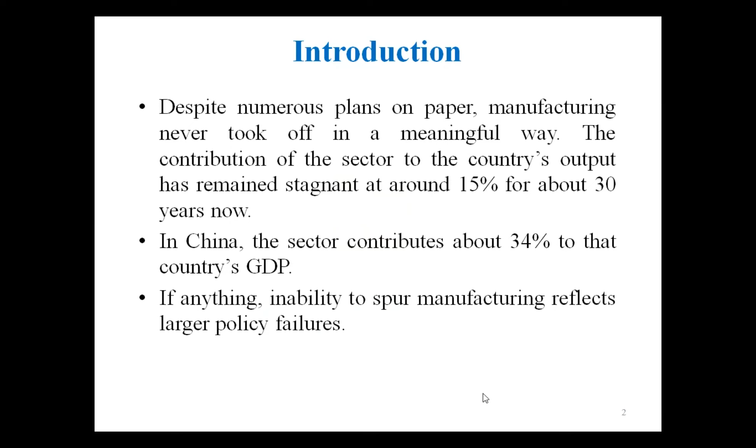So I have taken this as the topic for discussion. I will take some signature slides before I start about waste management. One reason we are interested in this is because we want the contribution of the manufacturing sector to increase. As per Niti Aayog data, the manufacturing sector is contributing just 15% to the GDP, whereas in countries like China and other developed nations, the contribution of the manufacturing sector is more.

To address this problem, the government of India has set up a National Manufacturing Competitiveness Council, headed by the Prime Minister of India, and they are interested in increasing this contribution. If you Google the Niti Aayog website, the government has an aim of increasing the contribution of the manufacturing sector up to 25% by 2025.

So just after 5 years, the government is planning a big change, that the contribution of the manufacturing sector should be 25%. Why? Because if this happens, there will be 100 million jobs for engineers, right? So typically during the COVID period and post-COVID period, there will be a lot of pressure on different agencies, specifically government, for boosting the sector for jobs, right?

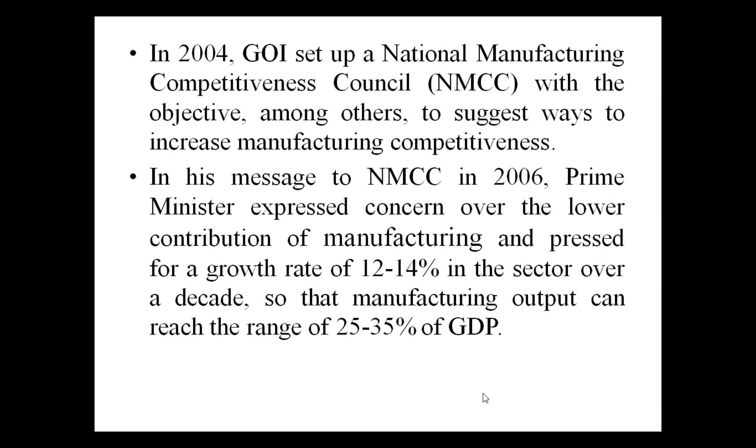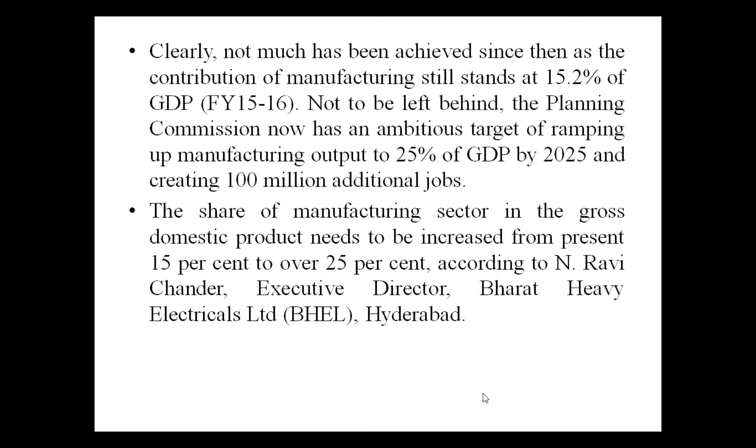Not only the government but non-government agencies, like public sector people, are also talking about the contribution increase in the manufacturing sector. One of the problems is that if we look at this contribution, we have to talk about the concept of circular economy, basically reducing waste, through waste management and recycling.

Along with this, there are issues like problems with infrastructure, finance, land acquisition, and labor laws. To understand and solve these problems, we need a solution, a technical solution through technical intervention.

There were meetings at different levels, at government level, at public sector level, even at the private industry level. In one meeting with CII and the Government of Andhra, it was concluded that innovation in product and process should be the key driver for growth in the manufacturing sector. The ultimate aim of all these discussions, like through Atal FDP or other mediums, is to increase the contribution of the manufacturing sector.

Increasing contribution can be done through reducing waste. The second important concept is innovation. If we have innovation in product development and process development, we will have a lion's share in the market, we will be the pioneer, and finally we will have a better position regarding financial stability. Keeping these things in mind, the government is very serious about increasing the contribution of the manufacturing sector.

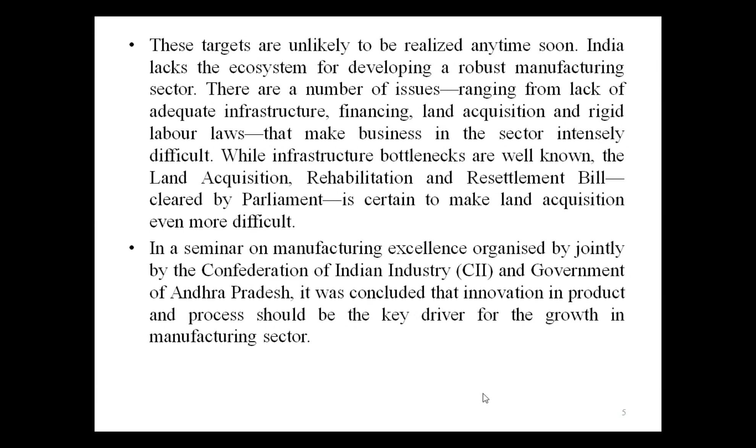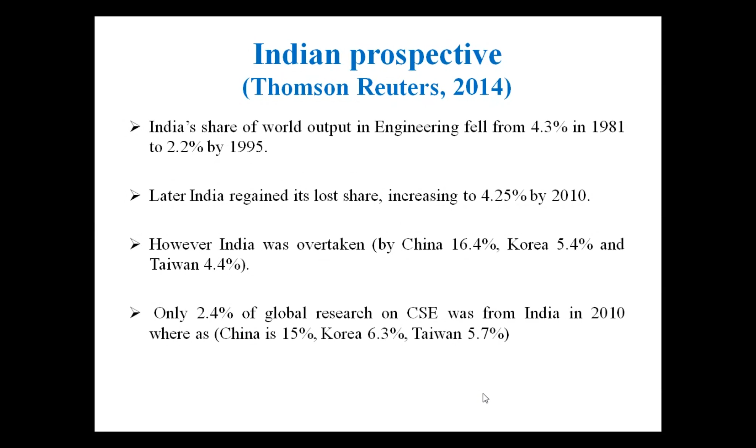Whereas China, Korea, and other countries are contributing better than us. We normally say we are good in software development, but our contribution there is only 2.4%. So we have to do a lot of research at institute level and lab level, and come up with innovative products that can help us get a better contribution of the manufacturing sector to the GDP.

There can be different methods of helping with this, and one method is waste management. Waste management is basically divided into 8 groups: source reduction, reuse, animal feeding, recycling, composting, fermentation, landfill, incineration, and different land applications.

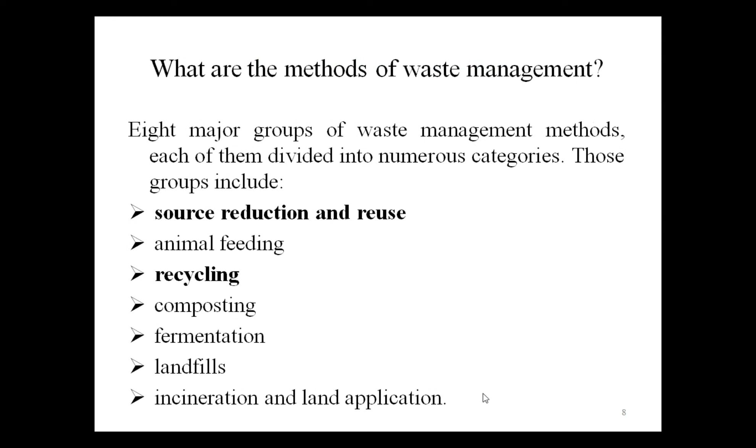But for the present discussion, since we are focusing on additive manufacturing, we will mainly be talking about source reduction, reuse, and recycling. That will be the discussion for the next hour, through additive manufacturing.

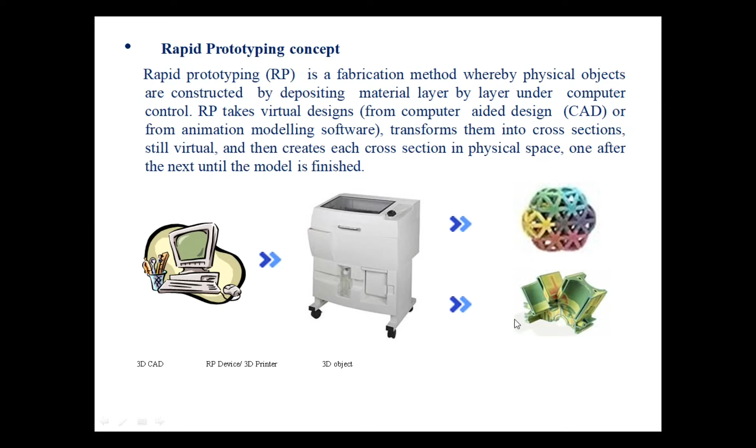Since this is an Atal FDP, and for the last 4-5 days we have been talking about 3D printing, just as a signature slide: 3D printing basically involves CAD data given to a 3D printer, which produces a layer-by-layer printing of material, forming the finally finished product.

In another way to represent the same thing, we have different layers, and each successive layer gets bound to the preceding layer, maybe through melting or partial melting, building up a platform until we get a 3D printed part.

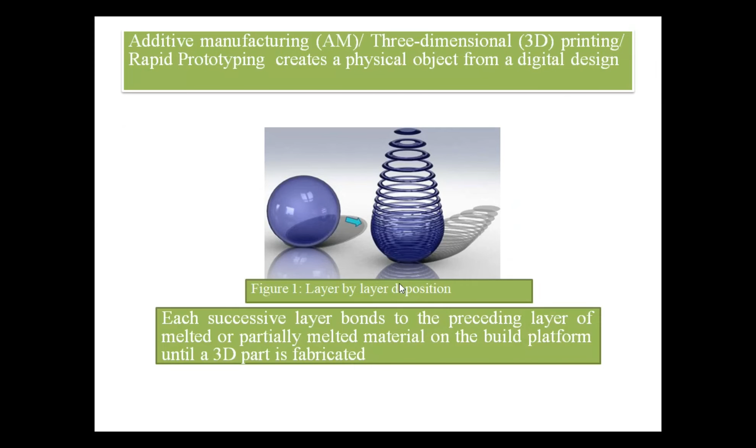Now, in addition to 3D printing, there is 4D printing, specifically for waste reduction. The idea is that in 4D printing we have some smart type of material which can have typical applications, specifically in waste management.

If we talk about adding more dimensions to the printed part, it will have wonderful applications. Imagine you are in a shopping mall or tourist place, with chambers where you feel 5D, 6D, or 9D effects. What we are actually doing is adding some extra sense to the material. Similarly, if we are interested in waste reduction, adding some sense to the waste material can be really useful.

A simple example: nowadays, typically in urban areas, we have milk in some polymer packing. Once we take the milk out of those plastic bags, we used to throw it in the dustbin. Now just imagine those polymer bags are going to be added into the municipal waste, and once we have that type of waste, it will create a lot of problems.

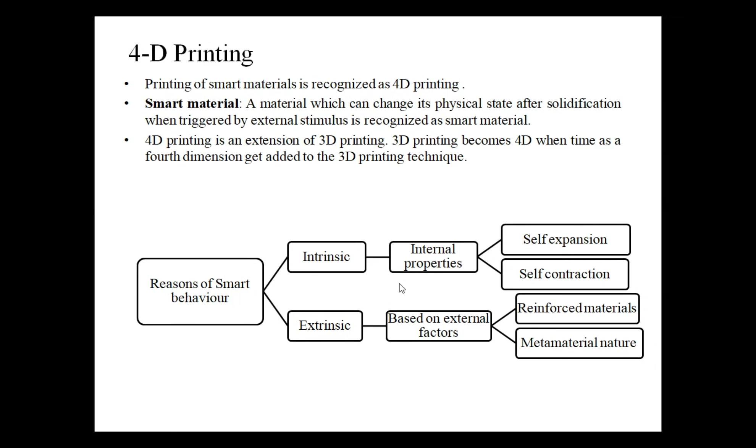We have some kirigami and origami type structures where we are getting the final property of the component, not because of the inherent property of the material, but the way the different components are attached. Like for example, take the example of a railway bridge. We use the concept of trusses there. So a lot of load, and the weight of the bridge is reduced. Now the length of the different links and the angle at which those links were basically engaged, that result into the formation of a meta material, and typically applicable for the 4D printing applications.

To understand in a better way for the printed part, let us say my material is in state A. I give some stimulus, it is converted into the state B. The stimulus can be heat. Like suppose there is an ice, I give heat to it, so it is converted into the liquid state, right? So then again extract heat out of it. The stimulus is the temperature. So it is converted into the state A again.

So there can be the stimulus in the form of electrical field or magnetic field. Suppose your material is in state A, I give some magnetic field or electric field to it, it is converted into the state B, then switch off the electric or magnetic field, it is again coming to the state A.

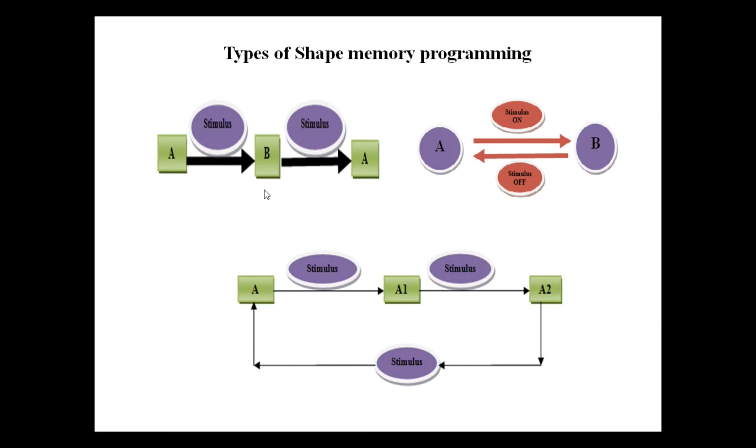Or there can be the multi-stage programming, like you can have some material from state A to A1 with a particular stimulus. It can be in the form of light, temperature, magnetic field, thermal, hydral effect, anything. Then from A1 to A2, another stimulus, then A2 to A3, or any n number of stages you can think of, which will be helping me in shape memory effect, specifically for the management as the waste management technique, right?

Now I'm giving you some of the additive manufacturing example where we can use this for the waste management through additive manufacturing. For the waste management purpose, let me introduce the audience. The waste management is basically categorized specifically for the polymers into the four categories: primary recycling, secondary recycling, tertiary recycling, and quaternary recycling. So what is the difference? You take an example. Suppose I have a virgin polymer, it may be, let us say, ABS or PLA or PA6, PVC, PVDF, PEEK. There are n number of polymers, right?

So I have selected a virgin polymer, and that virgin polymer I am using for making some part. Now the useful life of the part is over. I am again crushing it, converting it into the granule form, and then I am doing the extrusion process. Through the mechanical means, I am trying to make some feedstock filament again through the extrusion. The typical process we use is called the screw extrusion. So this is one way of recycling. We call it the primary recycling. So primary recycling by definition is using a mechanical means of recycling.

Then we have another way, that is called the secondary recycling, which is just similar to the primary recycling, but the difference is here we are adding some sort of a reinforcement into the polymeric material to enhance its property. For example, let us say I am interested in improving the mechanical property of the component, increasing the tensile strength. So I am putting some, let us say, aluminium powder or copper powder, which will be helping me improve a particular type of property, maybe thermal conductivity, maybe electrical conductivity. So secondary recycling is again using a mechanical means of recycling, but here I am doing some sort of a reinforcement.

So what we did is we reinforced the banana fibers through mechanical recycling in ABS and PA6, and we prepared the feedstock filament, right? There is a very good paper by Baharin et al. which says how to condition the banana fiber. So based on that paper we selected 1000 micron length and 100 micron dia cylindrical shape banana fiber, which were prepared at the lab scale. And to start with, we started with the reinforcement of banana fiber at, let us say, 5%.

So we have four categories now: primary recycled ABS, then secondary recycled ABS. Secondary, why? Because now 5% banana fiber has been added. Then primary recycled polyamide and secondary recycled polyamide with 5% reinforcement of the banana fiber.

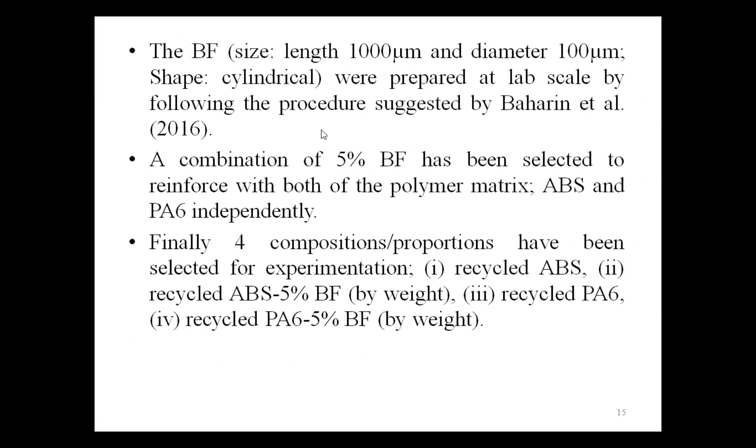How to do the reinforcement? So this is the twin screw extruder that is available in our lab. You can see here there are the two screws. I put the raw material over here. Here is a mixing chamber, and on the other side I get a prepared feedstock filament. So there are some parameters that we can control, like the temperature in this chamber.

I can control the nozzle dia, because typical commercial 3D printers have nozzles from 1 mm to 4 mm, but most commonly used FDM based printers are in the range of 1.75 mm, right? So if I have a nozzle of 1.5, then I can easily get the 1.75 dia wire. There is another parameter, the torque or the RPM, that I can control for this screw, and we can play with these parameters and finally control the dimensional features of the feedstock filament.

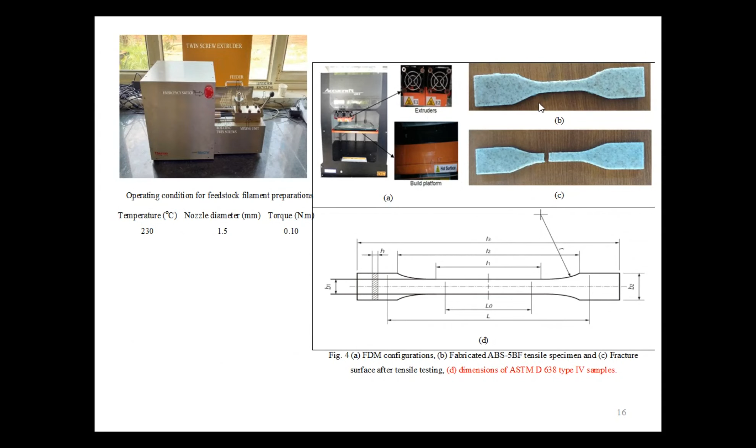So finally that feedstock filament, which has been prepared with the reinforcement of banana fibers into the ABS and polyamide, we printed the specimens. You can see some tensile specimens of ABS, and then of course we prepared the fractured samples also for the flexural strength as per ASTM D638 and D790 standards, right? This is really important to understand.

Now to understand, let us have one simple example. Suppose I purchased two plastic buckets. One bucket I put in my bathroom, and the second I put on the rooftop. You will see after a few days, the bucket that is on the rooftop may have developed some cracks, whereas the bucket of the same company, same quality, same cost, everything same, may be working in your bathroom for maybe a couple of years.

Now, why this? The answer is that in the aggressive environment, maybe excessive heat and excessive cold, the energy absorbing capacity and energy releasing capacity of that thermoplastic material is not commensurating with the change in the environment. Like in the night, the temperature may become very low, and during the day, the temperature may be very high. So once there is a change in the temperature, the energy absorbing during the heating cycle and the cooling cycle for that particular material is not matching with the way the temperature variation was observed, right?

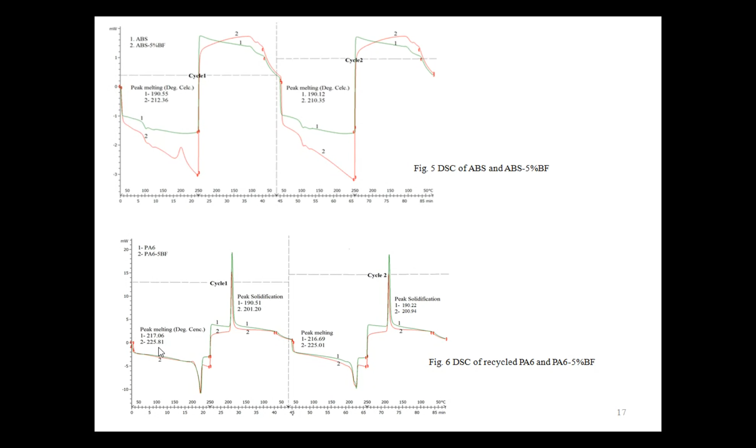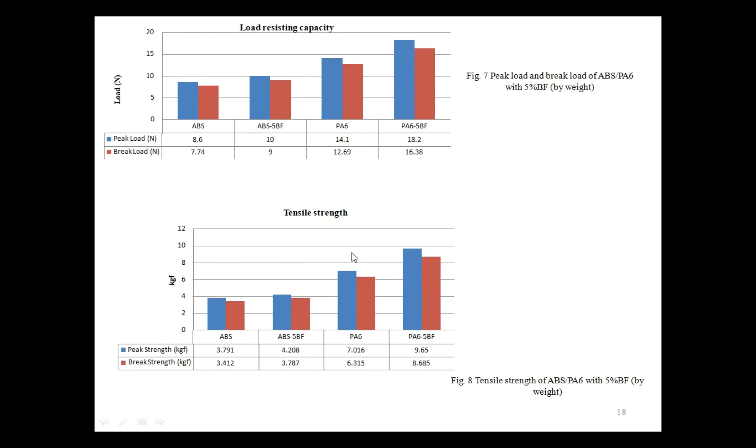Then we did some mechanical testing of the samples by printing, right? So you can see the peak load and break load have been significantly improved once we add the reinforcement for the ABS as well as for the PA6. Similarly, the peak strength, break strength, and their elongation behavior have been improved.

Now I give you one typical example. Just imagine I am interested in constructing a house. So I have to go for a lintel, and what we do is we put the iron bars. Those were tied with the MS wires, and then I put the mortar for making the lintel, right? Now those iron bars were tied using the MS wires, which are very prone to oxidation.

But if I use this ABS or PA6 reinforced banana fiber, you see the percentage elongation, specifically the break elongation, is very high. So just imagine, suppose there is a chance of some movement in the earth, and there is a collapse of the whole roof, right? Because of the high elongation of this material, this will help me, and the roof is not going to collapse immediately. The strength in the form of peak strength, break strength, modulus of toughness, Young's modulus, and the elongation for this material is better than that of the MS wires that we are commercially using for tying the iron bars in a construction site.

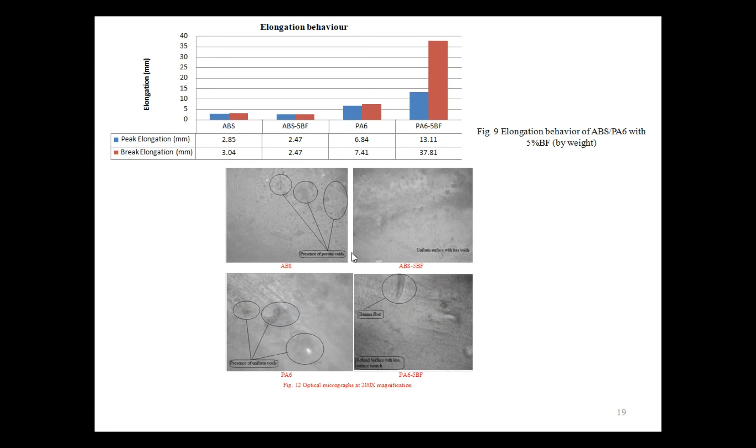We also did some morphological analysis to see what is the level of porosity. What we observed, the porosity level was significantly reduced. So we can actually do the optimization for this type of application, right? So this is one way of managing the waste. How do we manage the waste? We manage the agri waste. We manage the plastic solid waste. We do the secondary recycling.

We prepared a useful feedstock filament. That feedstock filament can be used for 3D printing. We can easily 3D print. So 3D printing will be there once we have a feedstock filament. And for the feedstock filament, the sufficient mechanical properties in the form of Young's modulus and modulus of toughness I am managing, and then it can be one of the good replacements for different applications, right?

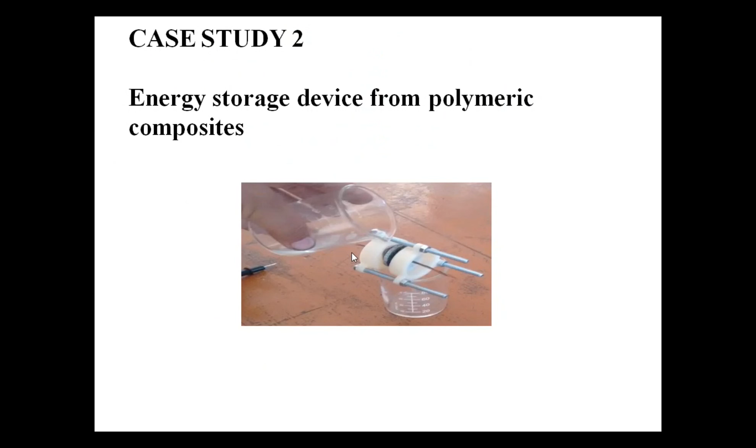Now I'm going to share with you another example of a 3D printed energy storage device, which can be another way of doing waste management through additive manufacturing, right? So if you typically see the cell which we call the battery, the AA size battery, or in our common routine language the pencil cell, right? It has basically four zones. We have a graphite cylindrical strip.

Then we have MnO2. Then we have an electrolyte in the form of zinc chloride and ammonium chloride. Then we have the zinc plate, right? So once we assemble this, because of the chemical reaction, we are able to get the final potential output in the form of 1.5 volts. Now sometimes the cells are getting wetted and we have to throw them out. And if you see, only the section where MnO2 was present is being consumed, whereas the rest of the section remains as it is, right?

Just imagine, in place of having that cell, if I print the different sections in the form of discs and then assemble, whether it will be more useful, because the disc which is consumed, like the MnO2, only that disc I am going to replace, number one. Number two, presently if you see in any house, you have a number of wall clocks, a number of remotes for operating your television, your dish, your audio system, video system, different types of things.

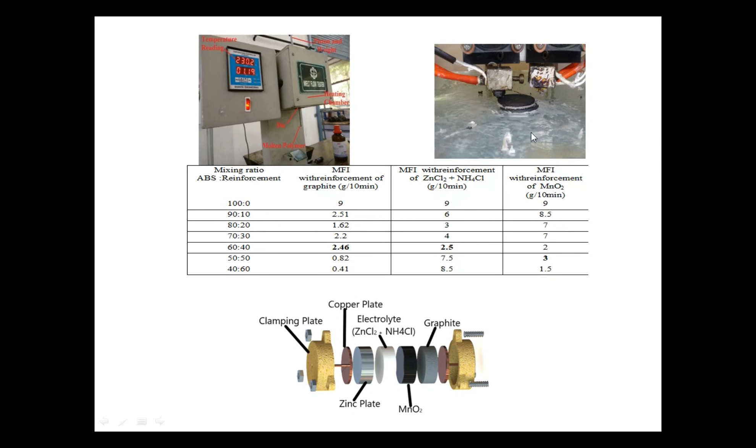So once I establish the rheological property, MFI, of the material, then I print the part as shown in the figure over here. This is the actual 3D printing going on. We printed the different discs. Once the discs were printed, we assembled them, and through this assembly we tried to see what potential difference was coming, and we were surprised that we were not able to get any potential difference. That was really shocking, why we were not getting the output in the form of voltage.

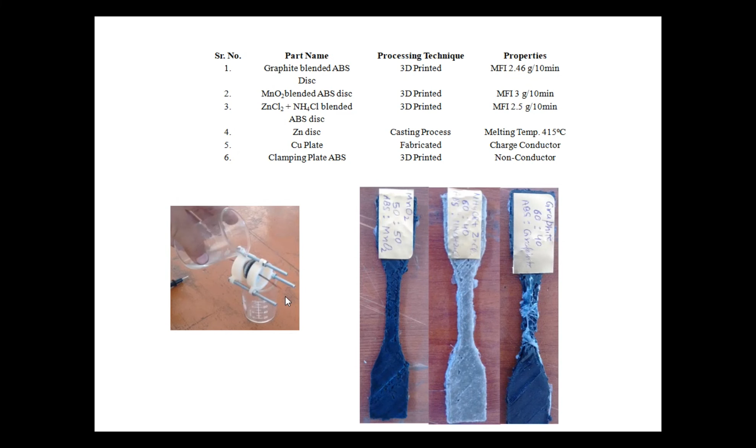Then we decided to charge this battery. How to charge this? Actually, I have ABS in which MnO2, ammonium chloride and zinc chloride powder, and graphite powder were reinforced and printed in the form of different discs. But ABS is basically an insulator, so it is not allowing the charge to flow for the chemical reaction. So we put some drops of acetone into it, so that the interface between the different discs is basically removed. Once we put a few drops of acetone, we were able to get an immediate 1.5 volt. We were so fascinated to see the output.

After this, we tried to see their thermal stability. Like I have already explained, we tried from room temperature to higher temperature. Similarly, we can go to sub-zero temperature; we tried it up to -40 also. What we observed is that the 3D printed cells we prepared were able to work at very high temperature, up to 95 degrees, whereas commercial energy storage devices are not able to work at such high temperature.

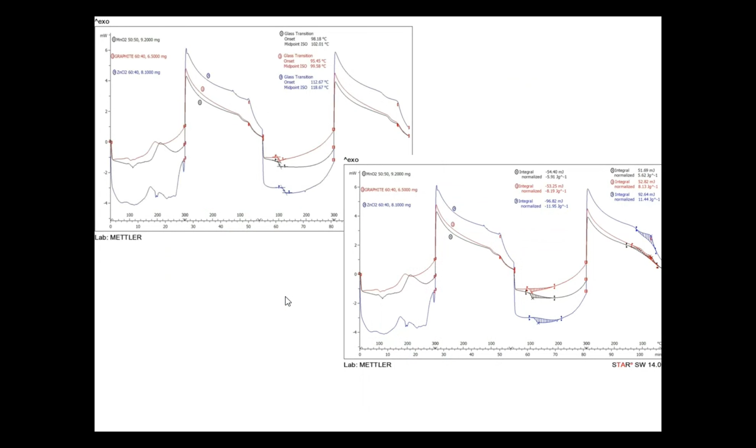Similarly, for your remote batteries and cells, once you go to lower temperature, the flow of charge is not happening properly. So if I have a shell of ABS in which these chemicals or salts have been reinforced as secondary recycling, we were able to use it at excessively high as well as low temperature. Another important thing is that we were able to consume 40% polymers, which is basically recycling. So this is another way of waste management through recycling, following the additive manufacturing route.

Additive manufacturing is putting the material layer by layer. I am printing the material layer by layer; I am printing the disc. So this is additive manufacturing. Different types of reinforcement are assembled together to complete the chemical reaction. The particular disc will be consumed, and I will be replacing only that disc.

For example, if you go to some local shop and they don't have loose change, normally they give you some candies, right? Now in place of candies, maybe after 1 or 2 years, the shopkeeper will say, take disc 1, 2, 3, 4, whatever you want, for 1 rupee or something like that. So that can be the future, where we can have household 3D printed discs which will be assembled, and you can get a relatively longer cell life in the form of potential difference, and you can work at elevated as well as low temperatures.

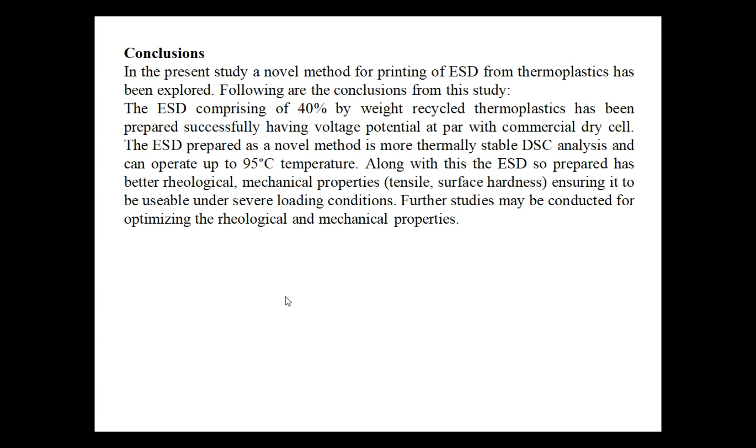So this is also another way of waste management through additive manufacturing. Now I am going to discuss this with you.

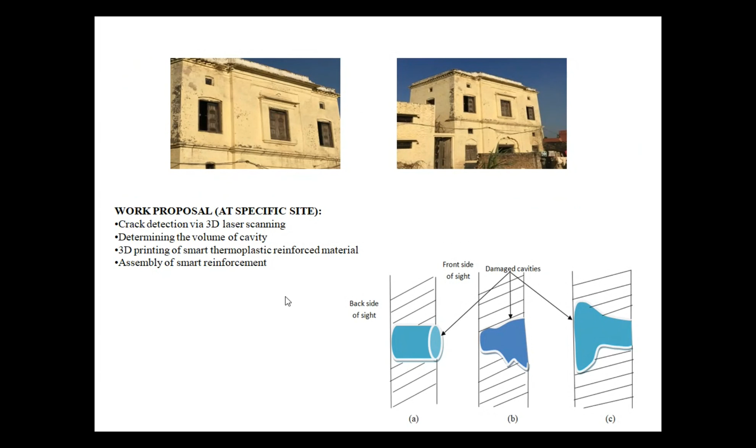This is one of the projects that we are doing, sponsored by DST, for the maintenance and repair of heritage structures. I'm showing you one of the heritage structures which was built around 1902, and since this heritage structure is in a rural area of district Ludhiana in Punjab state, we are interested in the maintenance of this particular structure.

Now, what is the actual problem? Suppose this is the heritage wall. This side of the wall is accessible to me, but this side of the wall is not accessible to me. And suppose there is a crack or cavity which is something like this. I can fill this sort of cavity with some filler.

One common example is a commercial solution by a company called Hilti. They are giving an epoxy-based solution. So basically, some epoxy based material is there for these types of cavities, specifically for heritage structures and buildings. We use these types of fillers.

Now there is a second option. Again, the entry in the wall is large, but on the rear side the cavity is small. Again, here the commercially available solution works. But now see figure C. There can be a third case when the entry in the cavity is small.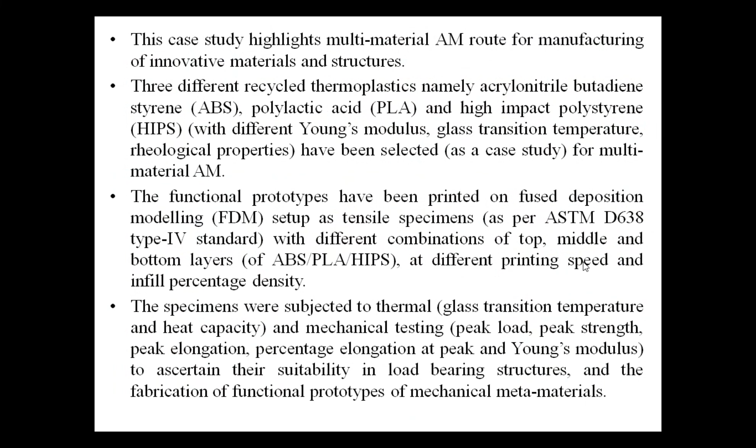So what the idea is, from the 3D printing viewpoint, I'm just sharing with you. For the basic idea, we selected three polymeric materials: one is ABS, second was PLA, and third is HIPS.

So why did we select this? Just to distinguish that these three different materials have different properties. Like HIPS, if I see the MFI, it is 7.5 melt flow index. I already explained what MFI is, how many grams per 10 minutes this material flows through a standard MFI tester as per ASTM D1238D standard. You see for HIPS it was 7.5, for ABS it was 8.7, and for PLA 13.52. That means the flowability of PLA is more. So if I work under the same temperature condition, PLA will have better flowability.

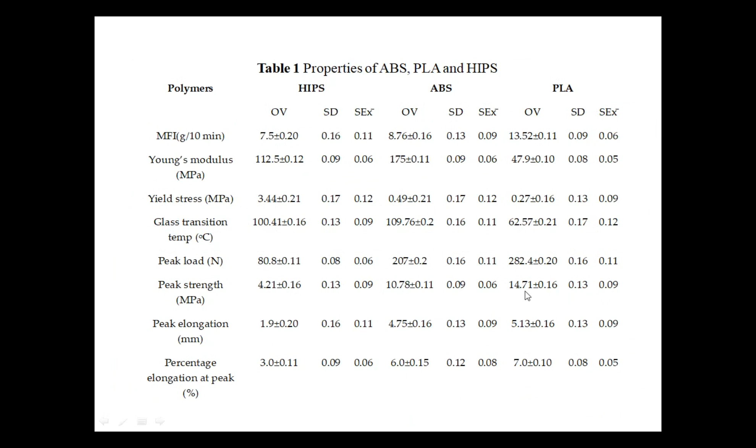Then there is a lot of difference in their Young's modulus. You can see for HIPS it was 112, for ABS it is 175, and for PLA it was 47.9. Then there is a difference in the yield stress, and a difference in the glass transition temperature. You see 100 here, 109 here, 62 here. Then you can see the difference in peak strength: for HIPS it was 4.2, for ABS it was 10.78, and for PLA it was 14.7. Then other properties like peak elongation also showed a difference.

Now what we did is select a simple 3D printer, an open source FDM printer, with some fixed parameters like diameter of the nozzle 0.3, diameter of the filament 1.75, each layer height 0.27, number of peripheral layers, number of top and bottom layers fixed, and filling pattern rectilinear. We can fix around 15 input parameters on an open source 3D printer. Then travel speed, extrusion temperature, and bed temperature were all kept fixed.

So what we actually varied was the infill percentage, infill speed, which we are also calling printing speed, and the material combination. What is the material combination? Like the lowest layer is ABS, followed by a layer of PLA, followed by a layer of HIPS. So this is basically multi-material printing: ABS, PLA, and HIPS. In another combination, PLA, HIPS, and ABS. Then in another, HIPS, ABS, and PLA. So what this structure is going to give me specifically for the smart structure, we will see.

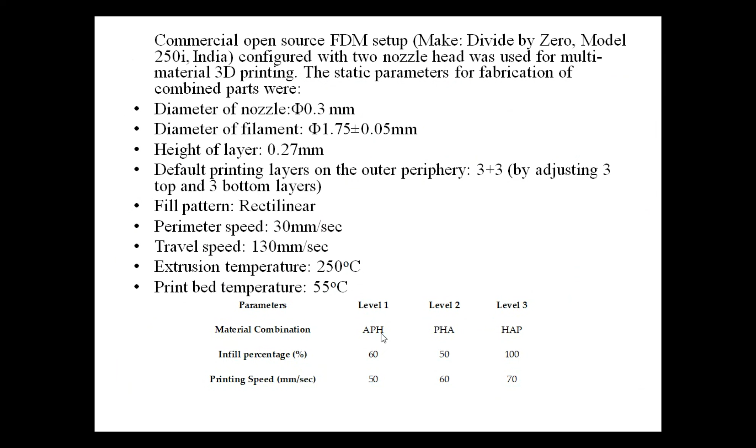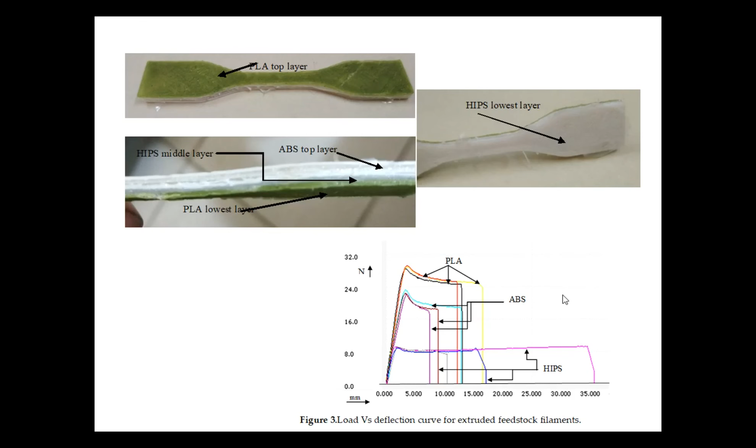You can see here I have the top layer of PLA, here ABS, here the lowest layer is HIPS. Now for a single material, once all the layers are of a single material like PLA, ABS, or HIPS, we try to see the stress-strain diagram. We prepared the specimen as per ASTM D638, and tried to see the area under the curves for the modulus of toughness and how this material is behaving.

Then we also tried to see their thermal stability, like from room temperature to 250, from 250 to room temperature, then room temperature to 250, and again to room temperature - different heating and cooling cycles. Normally it is recommended to see a minimum of 3 cycles to establish this.

So we see how much energy it is absorbing. Like one, that was ABS, it is absorbing 13.63 in heating, and releasing 13.52. That means the material is thermally stable. Whereas for PLA it is absorbing 14.71 and releasing 10.80. That means there is a problem with the thermal stability of this material.

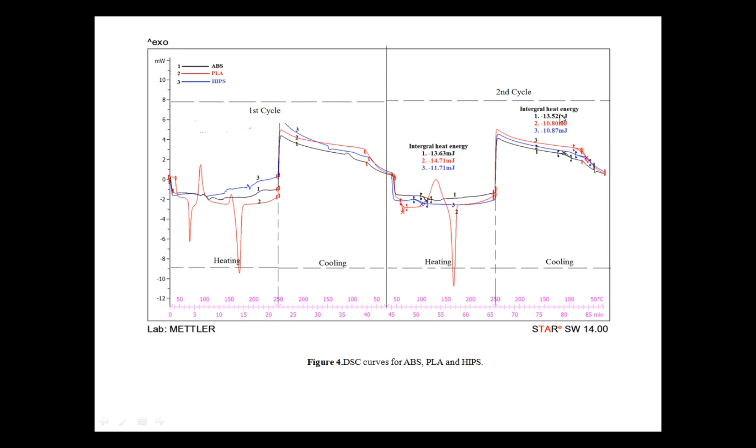Once we print this, it may create some problems regarding the thermal stability of the part. Similarly for HIPS, I have some data: it is absorbing 11.71 energy and releasing 10.87, so there is a little difference. ABS was considered to be the more stable material.

With different compositions, I recommended, for example, top layer of ABS, middle layer of PLA, and different combinations as per DOE. So we printed those parts and tried to see their effect on the stress-strain diagram.

Now this is really important. We actually printed the part, and in this diagram I looked at the morphology of the printed section. One limitation of 3D printing is the staircase effect. In the top layer here, with single material ABS at 30x magnification, and similarly for PLA and HIPS, you can clearly see that even with a single material, there is a staircase effect due to layer-by-layer printing.

In case number 1, 2, and 3, I have the lowest layer of ABS, over which PLA was printed, and over that HIPS. You can see the PLA is bulging out, meaning the material is coming out. So if I have this layer combination with ABS at the bottom, followed by PLA, followed by HIPS, I may have a problem in the mechanical properties.

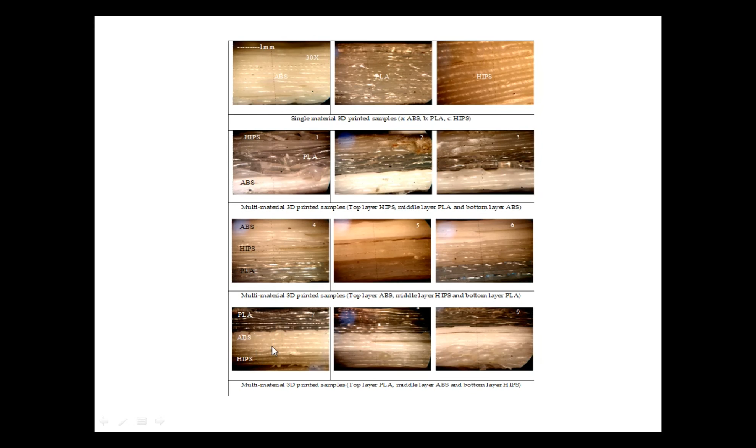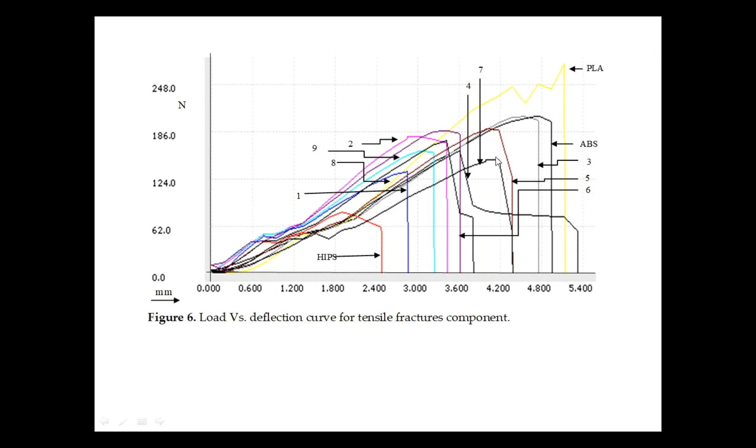I can correlate this with thermal stability also. In curve number 7, I get a very fine layer sequence: HIPS, followed by ABS, followed by PLA. This curve gives a very good result, and these are comparable with the virgin material as well.

What I am trying to explain through this example is for the maintenance of heritage structures, like the bridges I showed you earlier. An arch-type structure forms where the inner layer of the arc feels a compressive load, the outer layer has a tensile load, and there is a neutral layer also.

So if I am doing maintenance and repair of such heritage structures, instead of filling with a single material, I am interested in multi-material printing, so that where I require better tensile property, that material is selected for that zone, and where I require compressive property, that is placed on the lower side. With this combination of ABS, PLA and HIPS, selecting which layer goes lower, middle, or upper, I can select the composition and final behavior in terms of mechanical properties.

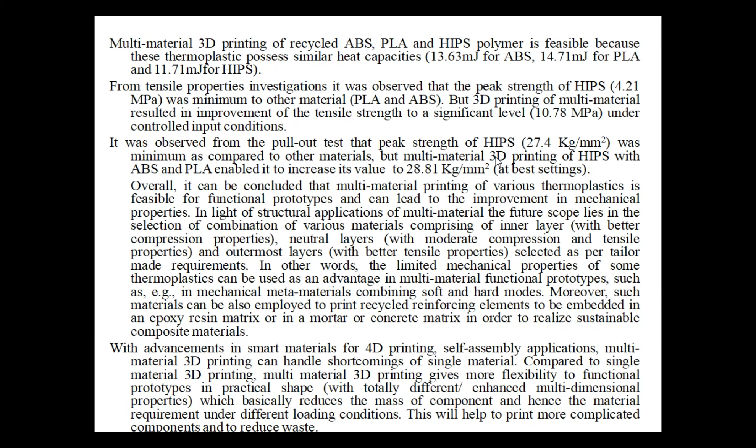So once I have to fill the strip in the cavity, I will just set the direction of the current in such a way that the whole strip is compressing, right? Once it has entered into the cavity, change the direction of the current. Now the strip is expanded. Right? So that is the idea over here. Of course, till now we have discussed the application in energy storage, application in the management of agriculture waste, then application in the area of structural engineering.

Now I'm going to explain with one or two case studies the typical application in dentistry. You will be surprised how waste management is applicable in dentistry also. I have already explained waste management: primary, secondary, tertiary, and quaternary. The first example of primary we have seen, and then we filled it with banana fiber or with different types of chemical or salt. It becomes a secondary way of recycling. Once we use some sort of chemical assistance, it becomes tertiary, right? Then once I use it for energy recovery, like typical investment casting, it becomes the quaternary way of recycling. So typically in dentistry, we are interested in this quaternary way of recycling.

So what we are recommending over here is, you see, nowadays, typically in some households, in the morning we take a breakfast of eggs, and the eggshell is thrown into the dustbin. That eggshell is a rich source of a material called hydroxyapatite. This hydroxyapatite is also called HAP. It has a similar composition, around 96% similar, to what our teeth have. Right? So just imagine there is an old age patient, and we need to replace the teeth. We need a replacement, right?

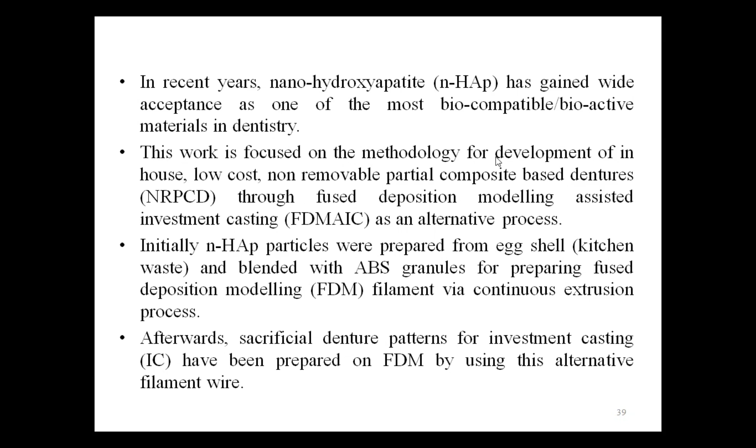We have to add some adhesive. Now this adhesive has some life. Now if my material, after putting an adhesive, is naturally getting bonded with the base, the life will be more. So that is the idea of working over this. So particularly, I will explain in a simple way.

So as a history, you can see the concept of this denture started, reported in the 7th century BC, and a lot of people have been there in Italy, specifically 7th century BC. People used to make dentures. Then, specifically in Japan in the 16th century, there were reports of using wooden dentures. Then there is a very good paper by Donaldson, which gives some examples that people were using animal bones to prepare the dentures or artificial teeth.

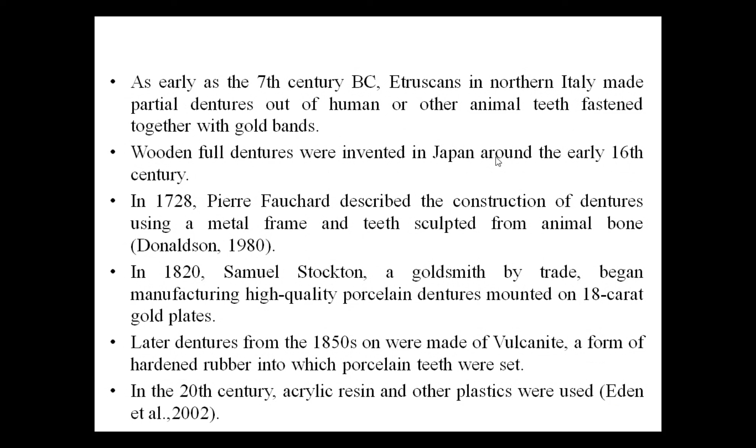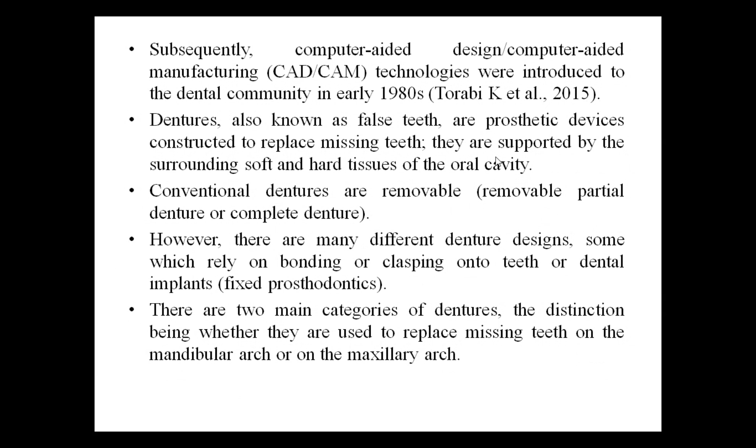Then in 1820, people reported using 18 karat gold plates for preparing these type of dentures. Then around 1850, different types of rubbers, vulcanite, hardened rubber, have been used with some porcelain coating for this teeth application. Then different resins have been used, in a 2002 paper. Use of CAD CAM has been reported in the early 80s. And nowadays there are different ways by which we can print the dentures.

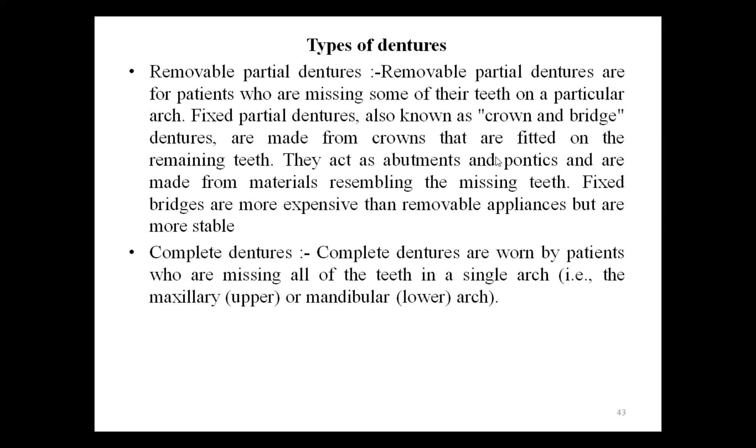Like I have already explained, there can be two types: removable and complete dentures. Removable partial denture means which you can remove, and complete denture means it's a complete one, right? And this is not a single teeth or multi teeth, but the complete maxillary arch or the mandible arch. Whereas a partial denture is not the complete one. Then removable or non-removable, that means the patient can remove or can retain it, right? So you can see the different structures of the partial dentures.

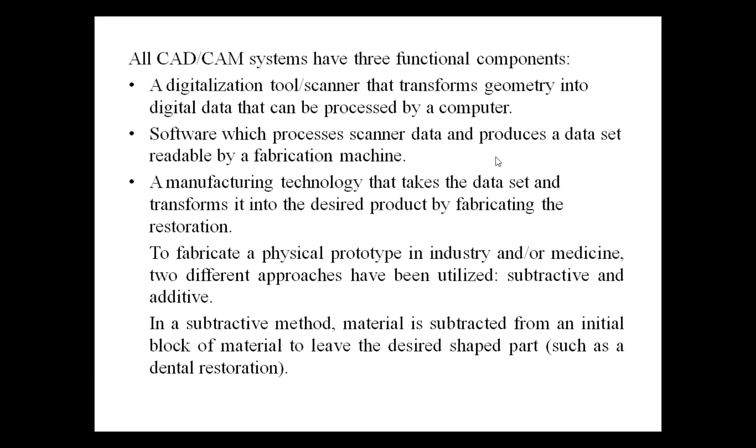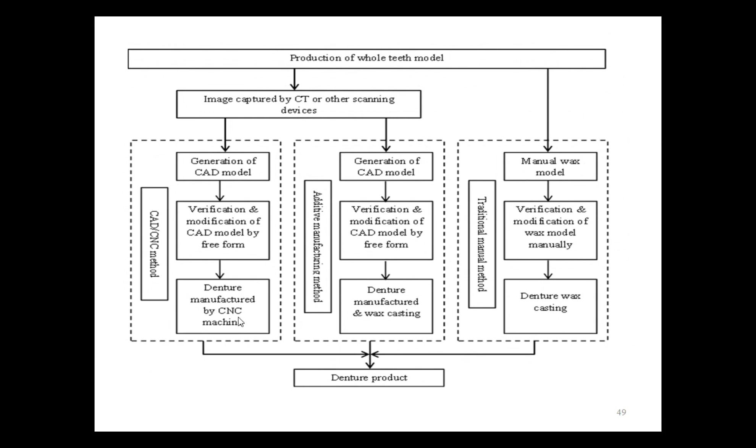Then in denture manufacturing by CNC machining, basically we have a lump of wax that is on a CNC milling or CNC lathe. We are basically making the similar part, right, through subtractive manufacturing, and then I am going for the investment casting route. Whereas in additive manufacturing, we will be using the layer by layer approach, and then I will go for the investment casting. So again, like I have already explained, we use the hydroxyapatite in the form of the eggshell waste.

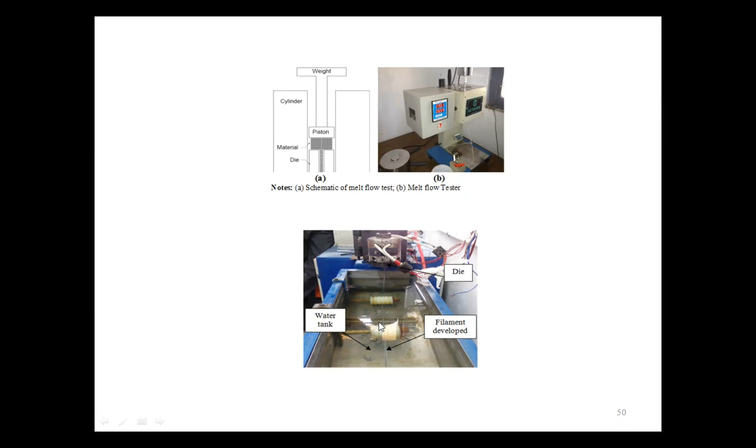So we establish the rheology, we prepare the feedstock filament, and finally we prepare the dental crowns over here. Now you can see here I am using a biocompatible grade of the polymer, which is acceptable for a particular type of patient. I have to go for the in vitro analysis based on the simulated body fluid.

I will do some SBF analysis for that particular patient, and whichever is the compatible thermoplastic, I will go for the different type of reinforcement proportion of the hydroxyapatite, and then prepare the feedstock filament, and I can prepare this type of crown, right?

If I am not interested in this polymer crown, then I will just attach it with the wax tree, and we'll prepare the nickel cobalt chromium based casting that can be installed either as a partial denture or as a complete denture in our patients, right? So this is another thing through which I can do the waste management. Now how is it waste management? Because I am using a recycled polymer, right?

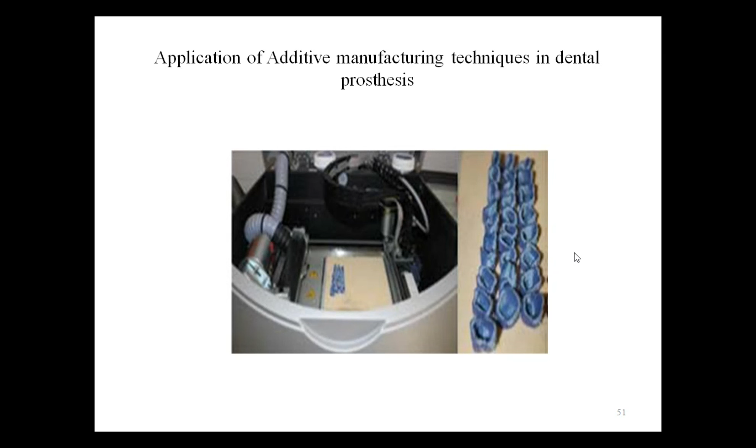Now once I do the investment casting, this is going to be invested, right? So the otherwise waste material is being invested as a quaternary way of recycling through the additive manufacturing route, right? There can be hybridization, again typical to the dentistry application. There is another orthopedic application.

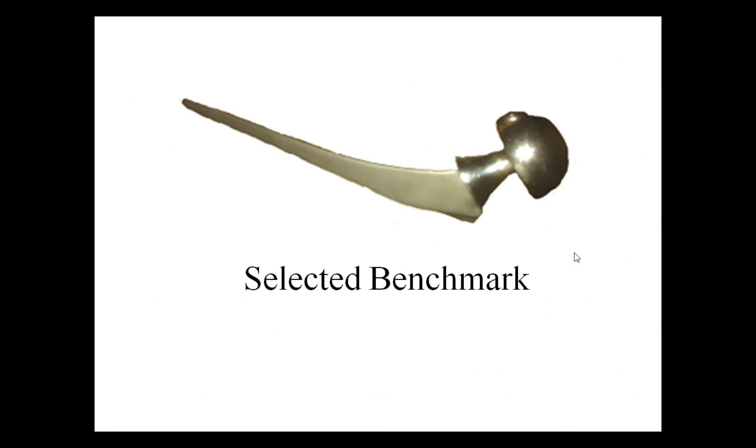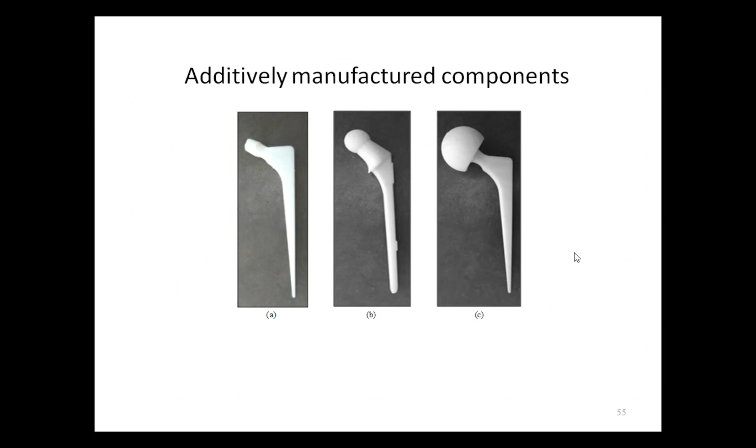You see here, like in the previous case, we prepared the dental patterns. Here we are preparing the polymer based pattern for the orthopedic application. This is particularly the hip joint, right? So these have been prepared. These specimens that you are seeing have been physically prepared from the waste ABS, right? Then we have the design for the investment casting.

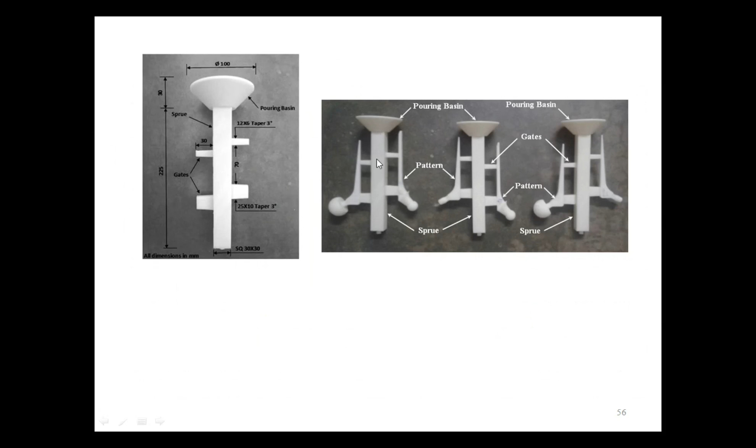I have to have a pouring basin, then the down sprue, then runner riser design, then attaching it with a common runner riser, and then you see in the coming picture I am putting some sort of wax coating to get rid of the staircase effect, because that staircase effect is a big problem in typical additive manufacturing. So if I just do the wax coating, I can get rid of the staircase effect.

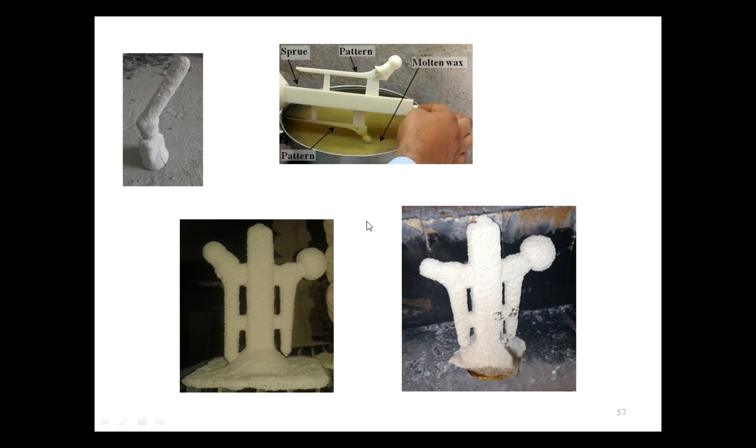Then I am putting the slurry layer like in typical investment casting, right? Then the de-waxing stage where all this polymer and wax is removed, and finally I am pouring the stainless steel 316L as an investment casting, and finally you can see I have prepared the investment casting. Now these are ready to use implants for the typical orthopedic application. This is the quaternary way of recycling using an additive manufacturing route.

So I tried to explain the primary, secondary, tertiary, and quaternary ways of recycling. Here you can see this is very cheap, and a cost effective and customized solution can be there. Otherwise, the standard implants available in the market are based on your body mass index. Here, taking it case by case, I can take the CT scan of the patient and prepare the final implant, maybe for orthopedic, maybe for dental application.

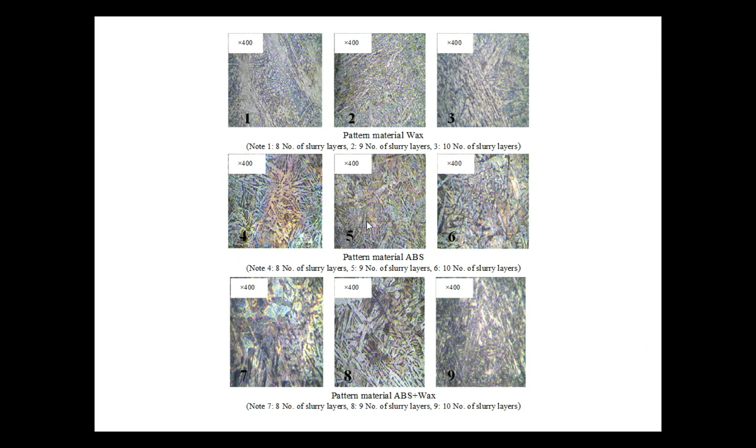Of course, we can control their mechanical properties, we can control their metallurgical properties, and we can have a final shape as per the final requirement. I can have any additive manufactured implant available. Finally, this is another case study that I want to discuss with you for typical 3D printing and of course the 4D printing application.

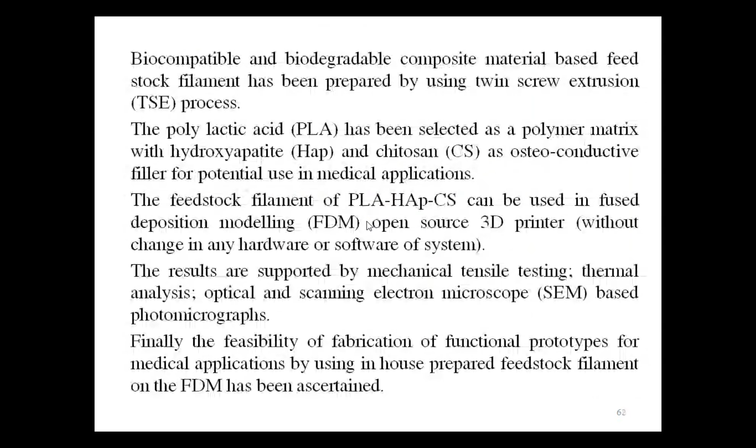Here what we are trying to do is we are using PLA as a matrix material, in which we are reinforcing hydroxyapatite and chitosan for preparing the feedstock filament. Actually, the idea here is, just imagine there is a patient whose bone has a breakage, and the bone is in two parts, and we need to put some spacer to give support, so that as the bone is growing, that spacer should come out, right? This is a typical application.

Once we have a patient who has had a serious accident and there is a multi-fracture in the bones, right? So normally the bone will take 3 to 6 months to regrow and fill that particular gap, right? So in the meantime, what we are trying to give is a spacer in such a way that as the bone grows, that spacer will dissolve. Now, to aggravate the growth of the bone, I am putting the hydroxyapatite and chitosan. Hydroxyapatite I have already explained.

As per the reported literature, if we put 8 to 10% of hydroxyapatite, it helps me in a big way of the bone growth, and 1 to 2% of chitosan, which is also a fish bone powder, it also helped me in a growth in a better way, right? So what we did is we took the twin screw extrusion.

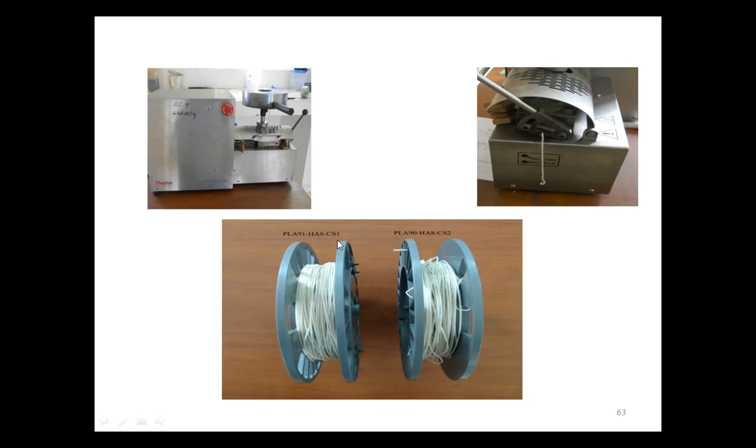So we selected the different proportion like PLA 91%. Why PLA was selected? Because it is a biocompatible material. Hydroxyapatite around 8%, chitosan around 1% to 2%. We prepared the feedstock filament. We did the thermal analysis for the different composition under the different heating cycle as per the body requirement.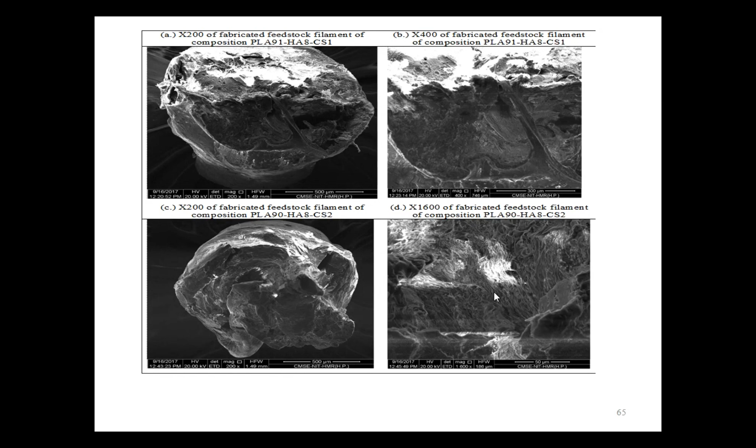So there will be a strong joint, and what we have to do as an engineer is the rate at which the particular bone is growing, I have to commensurate that rate with the dissolving rate of the PLA, right? So for that I will be selecting the proportion and some parameters on my printing setup, like the density, infill pattern, infill speed, raster angle, these type of things, and I can help in controlling the density, so that the rate at which my bone is growing and the rate at which my PLA is dissolving must match, and finally I will have a sound joint.

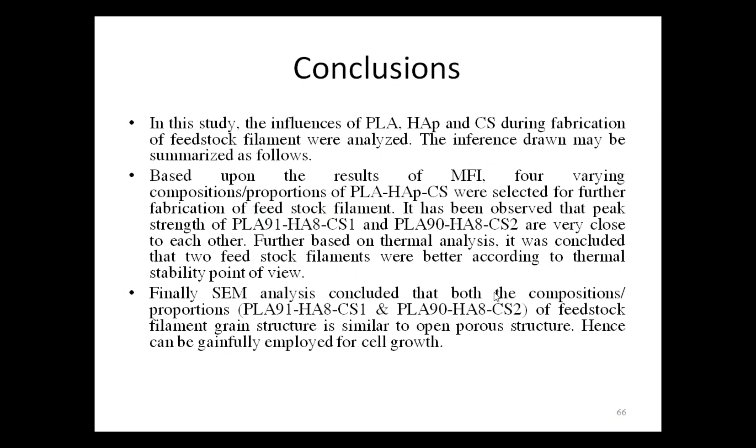So these are some of the ways I can manage the waste. I can use the natural resources that are available naturally to make some suitable useful product for the typical applications. I think that's all from my side. If there are some queries, I will be happy to answer.

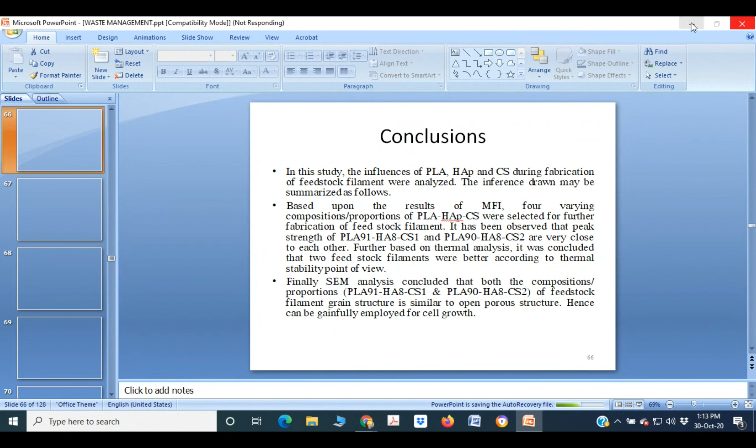The first question was asked by Mr. Santosh Kumar. What was the technique used for measuring the temperature profile? This is basically a DSC, differential scanning calorimetry. This is a standard setup for measuring the energy absorbed in heating and cooling cycle, right? So DSC is a technique actually.

Fine, sir. The next question is from Kottapalli Gurulingam. AM is an expensive process, and waste management is a cost reduction technique by recovery of waste. How do these two processes go together for an optimistic techno-commercially viable proposition in addressing waste management?

You see, in this particular waste management that we are talking about, we are interested in recycling. So this 3D printing is helping me to recycle in a very cost effective way. Why? Because I am using an open source 3D printer, and you will be surprised to know the cost of making around 4 kg of spool will be just 200 rupees, whereas the commercial spool is available around 5,000 to 6,000 rupees, right? So additive manufacturing nowadays is no more a costly technique, but it is now very much a low cost technique, right?